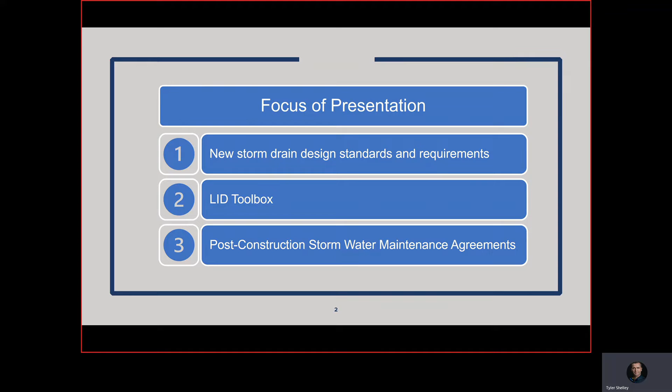So other than that, I'm going to start with an introduction of what we're doing here today. This is the focus of the presentation: we're going to go over the new storm drain design standards and requirements that we implemented about a year ago. Tyler's going to go over our LID toolbox. This is just a tool to help with the new LID standards and the post-construction stormwater maintenance agreements.

The reason that we did the updates was because the state told us to, basically, in a nutshell. We also wanted to update and streamline our standards and make sure that they were easily accessible and easily understood. We're still working on that. I know our website is awesome, but bear with us, we're trying to work on that the best we can.

Because we are under the Jordan Valley permit, we are a small MS4. We have to follow the state standards. The state required us to implement LID measures, low impact development, as well as revisions to our stormwater standards. The state standards were that if it's a new development above an acre, we must retain the 80th percentile storm, or a redevelopment that's above an acre, or you're increasing the impervious area by more than 10%, then you'll have to retain the 80th percentile.

I've run into a lot of individuals who think that regardless, you have to do the 80th percentile. It's actually not the case. This doesn't affect a lot of properties in Sandy because we are an infill city. There's a lot of development that doesn't have to do the LID measures, but if you do, we have stuff for you to help you out with that.

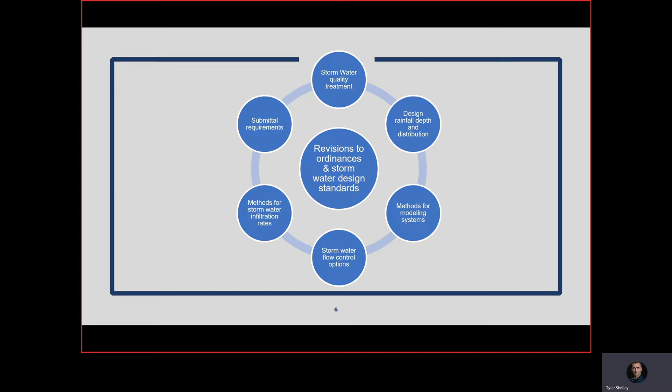As well as submittal requirements with COVID and working remotely from home, we wanted to get on the digital review bandwagon, which has been desperately needed for many years. So we're really happy we're finally moving in that direction. That's been a huge effort, but we are moving forward with it.

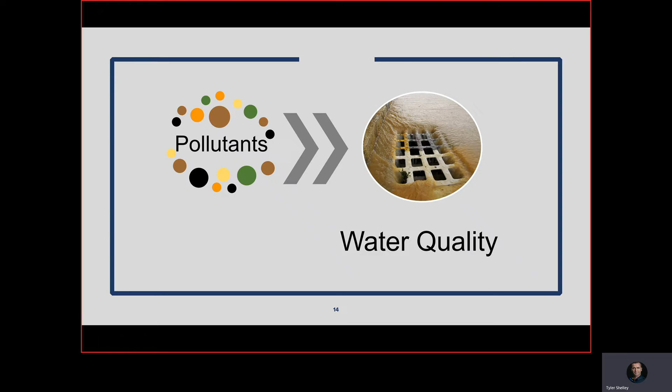So in our requirements, we're going to focus on - and I apologize, you're going to have to listen to me a lot because I've been heavily involved in development of these. So I figured I probably should just present all of this portion, and then others will follow on other things. But I'm going to focus on water quality requirements, the hydrology, and the hydraulics. Right now, I'm going to focus on water quality. So back to our table 1.

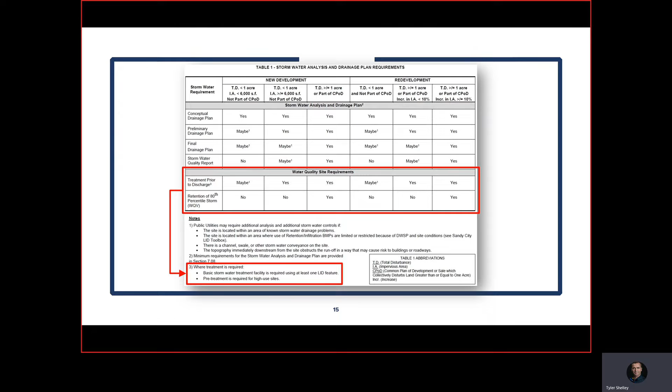So if you have to treat the stormwater discharge, we have two levels of treatment that we require. The first one is the basic treatment facility, and the other is pre-treatment facility. I'm going to talk about the basic treatment facility, and what this is - this is where you use the LID features that we will allow in Sandy City.

The state requires that each MS4 allow 7 LID BMPs, and if we don't, then you can use whatever you want. We've elected to choose the ones we want: bioretention, permeable pavement, wetland, dry or wet pond, vegetated swale, underground detention, infiltration, vegetated strip, and vegetated basin - which, in my mind, is kind of that typical detention pond that has always been done in the past. We consider that an LID BMP. It is, if it's designed appropriately.

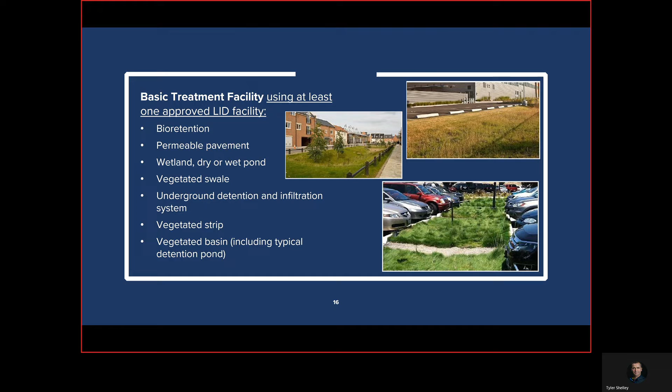Should probably silence my phone.

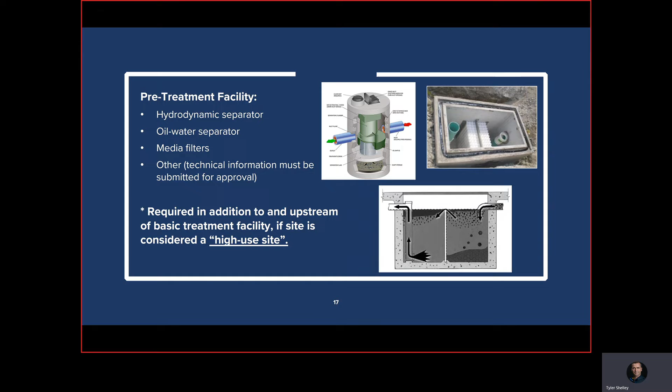Okay, the second is the pretreatment facility. A pretreatment facility is required only if the site is what we call a high use site - I'm going to talk about what that is here shortly. But the pretreatment is always required upstream of a basic treatment facility. Those include hydrodynamic separator, oil water separator, media filters, and other, if you feel like you want to propose something and we're okay with it.

All right, so I talked about the high use site. So no longer, typically in the past, we've said oh, you have a parking lot, well, you're sticking in an oil water separator no matter what - that's no longer the case. What was the reasoning requiring it to be upstream of basic treatment? Yeah, that's - it increased the cost quite a bit. I did prove that, okay.

The thought is that we, with knowing that there will be infiltration, that we would prefer to have it go through the pretreatment prior to where it would be infiltrating. And on a case-by-case basis, we would probably consider looking at other things that you're proposing that make sense.

The high use sites - again, these pre-treatment facilities are not required for every site, but the high use sites, a long list here, so you'll need to go through and see if your project falls into this. It's definitely not every site, but this does include some parking lots where traffic count exceeds 100 vehicles per 1,000 square feet of the gross building area. This typically includes supermarkets, convenience stores, gas stations, auto operations or fleet maintenance facilities, salt sand piles, and sumps. So if there's ever going to be a sump, the pretreatment facility would have to go upstream of it.

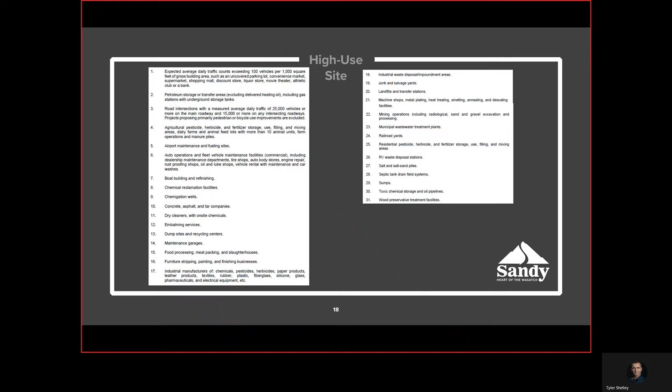All right, our water quality capture volume - so our precipitation depth that we've defined for Sandy City is a half inch.

We require that you calculate that volume using the SCS curve number method. You retain and infiltrate that volume where feasible. And this is a big thing we really spend a lot of time trying to figure out—how to incorporate this water quality capture volume into the flow control elements of your site.

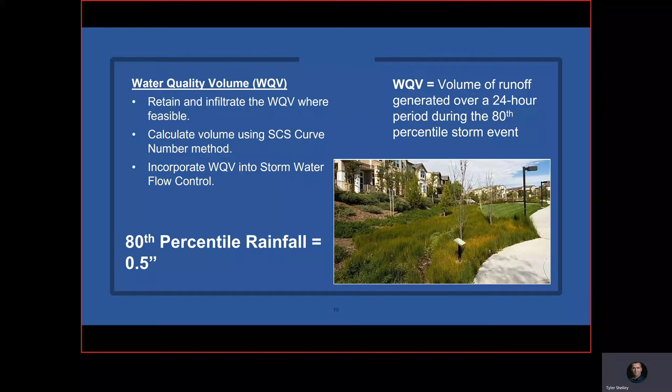Yeah, correct. Yeah, we do. And that's all in our LID toolbox, and I'll talk about that here shortly.

All right, so I'm going to jump ahead just a little bit to some hydraulics to tie that water quality volume in with our flow control.

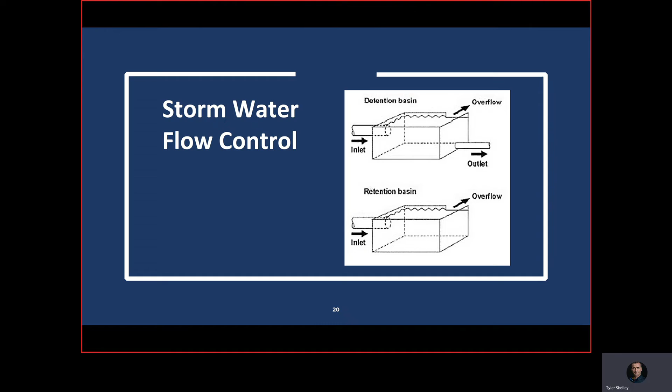So here's another critical table for you. Table 1 was knowing what your site's requirements will be. Table 10 is the next one—this is where we lay out our stormwater flow control options. This is kind of your menu of options for flow control.

We have options A, B1, B2, B3. The idea is that you'd start at the top and work your way down. However, that is not required—you can pick any one of these.

A couple of things I wanted to point out here: each option, other than B3, requires an analysis demonstrating that the 100-year, 3-hour overflow will be safely routed to the street and not flood structures. Even when it makes it to the street, you need to make sure you're not going to end up at the bottom of a cul-de-sac and flood a basement. So you have to look at that flow to see what happens.

Also, these options include full retention, some are detention, and there are combined detention options here. For detention, anywhere there is detention in the flow control, we require that the release rate is still 0.2 CFS per acre—typically could go down to 0.1 in some situations, depending on the downstream system capacity.

One last thing I want to point out before looking at each option individually: wherever there is retention, you're looking at the storm duration of a 24-hour storm. When you're looking at detention, it's the 3-hour.

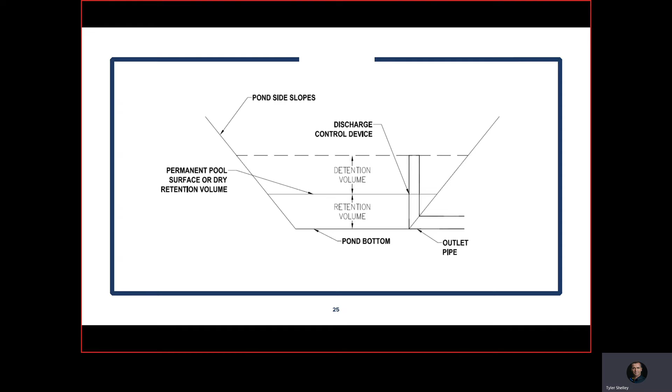Option B2 is very similar to B1. The big difference is there's potential for needing to detain the 100-year event. The reason for that would be a situation where you have a detention pond and a downstream system you can discharge your stormwater to. However, when you do your 100-year, 3-hour overflow routing, you find there's no way the 100-year can go anywhere—you're going to have to detain the 100-year. If you can detain it, you could also retain it, which pushes you to option B3, but I don't think anybody would want to do that since you have a connection to discharge to. You're just going to have to detain the 100-year.

In that situation, you now have to also look at your conveyances. You have to be able to actually convey your 100-year event into your pond. So there are some different things that you have to look at.

Option B3 is where you're having to retain the 100-year, 24-hour event. This is in a situation where there's no system downstream for you to connect to. The 100-year event, you're going to flood someone. Unfortunately, this is that option. I'm hoping not many have to use this option, but it is there in case it's needed.

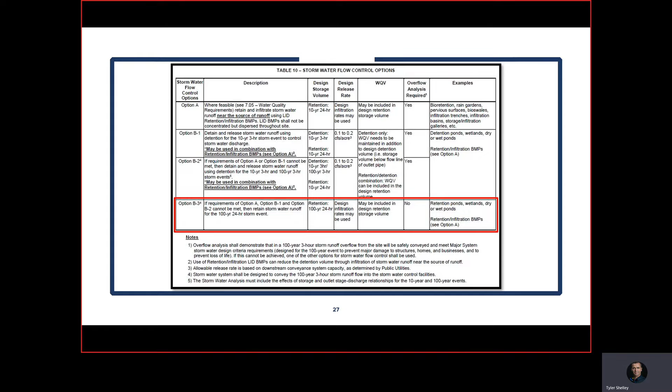Okay, if there are any other questions on that?

All right, so allowable infiltration. This map, although it's not current, kind of gives you an idea of where infiltration is not allowed. This is in our LID toolbox, but we will not allow any infiltration in our drinking water source protection zones 1 and 2, if they're clay soils, high groundwater within 2 feet of the bottom of your infiltration feature, contaminated soils, and if the slopes are greater than 10%.

We've shown some areas where we've anticipated it's not going to be feasible to go there. I think the only thing we're showing, and this actually isn't accurate, but within zones 1 and 2, absolutely no infiltration. Other than that, it's kind of on you to do your field work and determine if it's feasible or not. I'm going to get into some of these details.

So, Mason, we also have a GIS map layer that we can show you, kind of those no-go zones. You can kind of see it up here, it's kind of where the striping is. We can send that to you for your area for easy access, so that would eliminate that quickly. Again, I think the main thing is just those drinking water source protection zones 1 and 2 — you can't infiltrate there. Other than that, this is kind of giving you just a guess.

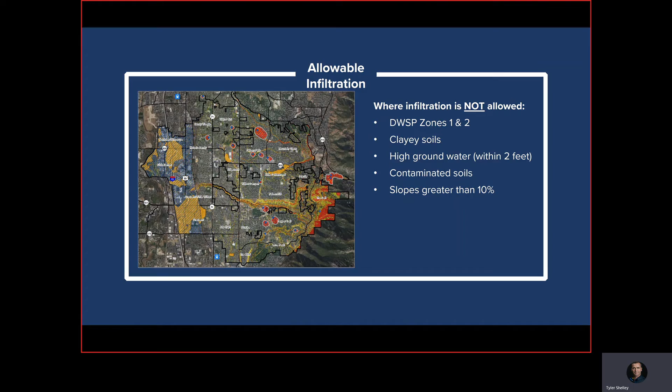Okay, so if you cannot infiltrate stormwater, what do you do? That's what I'm going to talk about now. We've kind of defined this, and I think the state guide does this somewhat too, but we've separated our retention and infiltration BMPs from our flow-through BMPs. If you cannot use any of the retention infiltration BMPs, it's going to push you to the flow-through BMPs.

And the reason we're doing this is, as you all know, the state has basically mandated this — it's shown there in the requirement. It says if retention of the water quality volume is infeasible, then a rationale shall be provided. So what we've done at Sandy City is tried, through all of this work, to give you a good rationale to say, hey, I can't do infiltration here, I'm going to use this method.

And you're going to document that in your stormwater report. Remember, I told you there's that drainage plan with the 2 elements — you're going to document it in your report, and part of that report is the water quality report that the state requires.

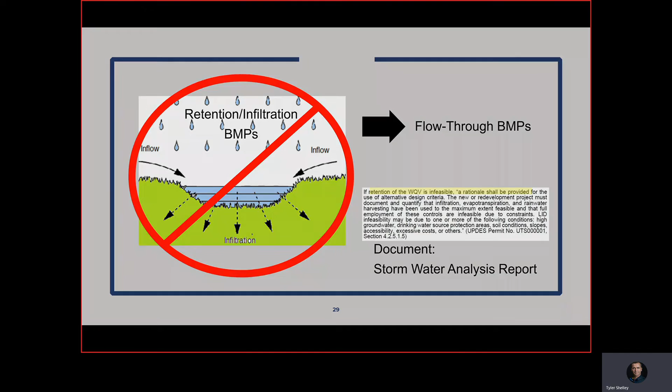However, you have to demonstrate that you are going to infiltrate within 72 hours, that it all infiltrates into the ground. Okay, for your flow-through — if this is what you're going to use, and we're going to walk through how you determine which one you're using — your design now is looking at just your flow rather than your volume. This is your 2-year, 3-hour storm event.

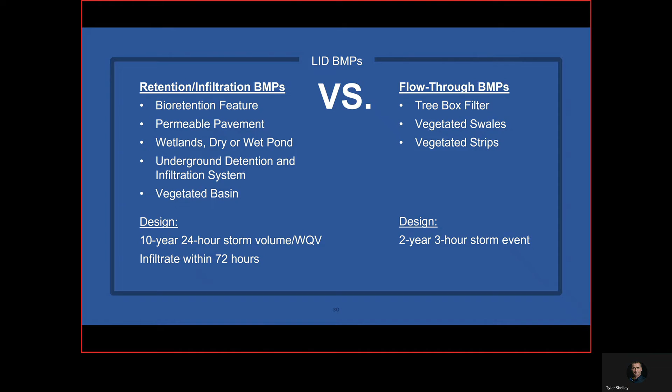And I'm sure most of you will have no problem, but it should be very helpful.

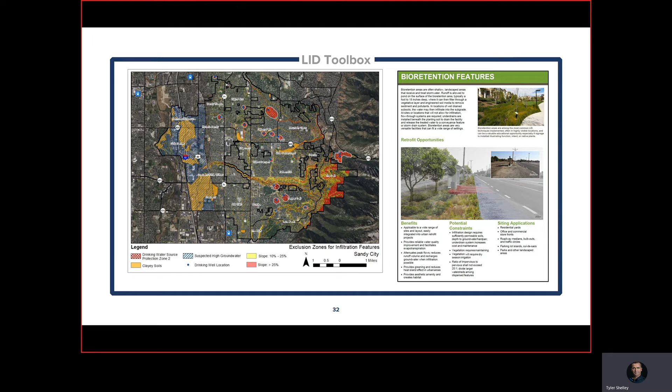In the LID toolbox, we have that same map, although it's outdated. We have fact sheets for each of the 7 BMPs, and that even has guidance for the benefits, constraints, siting applications. In fact, we actually require you to include these fact sheets in your stormwater analysis report, and you can address the different things in your report with that.

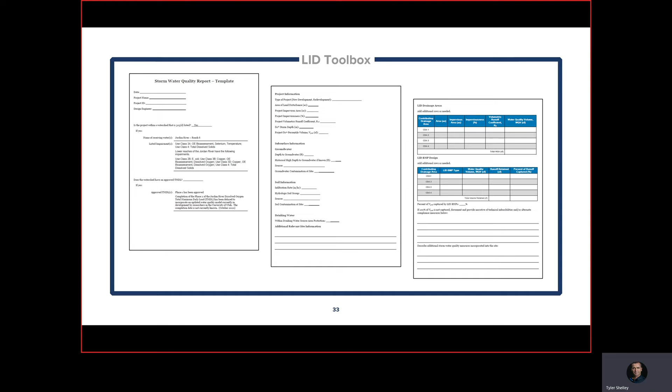All right, I'm going to go through an example here, and then we'll break for lunch. So this was a report that was just recently submitted, and I really liked their layout here. Although we haven't gone into detail reviewing all the details of it, I think it's very good, showing very well how this is to be used and how we want it to be used.

I think if you use it this way, it will make it a lot easier for us as we review it. And if it's not easy for us to review, a lot of times we kick it back and just say, hey, please resubmit, as you guys all know.

So for the first one, they kind of split this up into 2 subbasins, the north half and the south half. This is an industrial site just up the hill here that's being proposed.

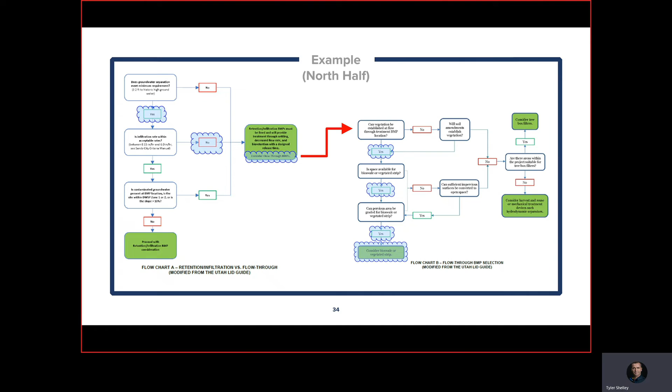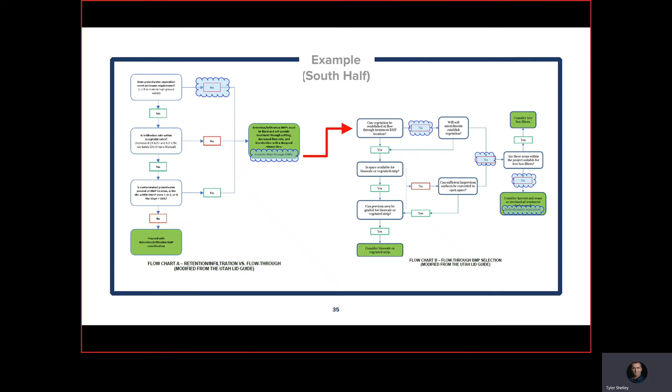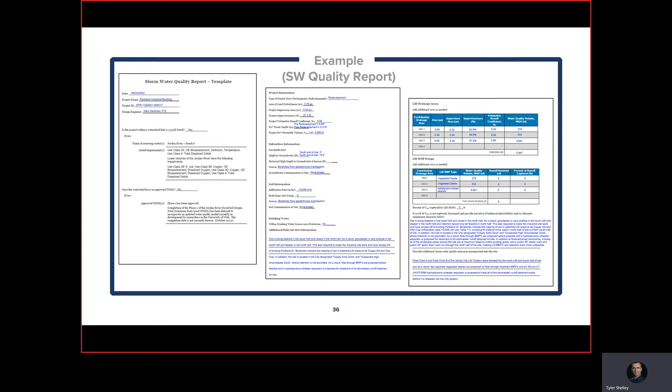We're going to have to see these reports every time now. So we haven't really been particular about receiving these, but this was kind of our kickoff saying, hey, from this point forward, I would highly recommend just walk through our document and submit everything we're asking for. In fact, Lenny's going to talk about some checklists that we've developed that can help you.

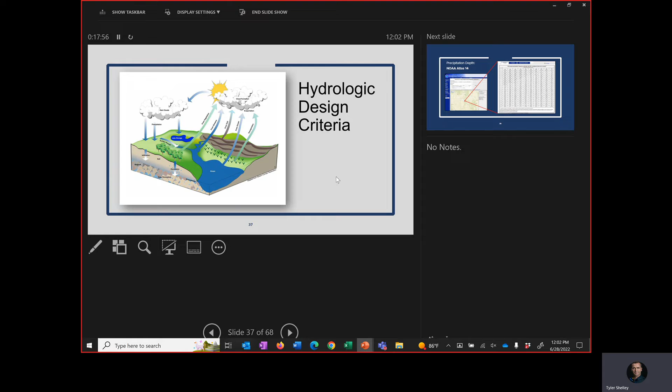All right, so we talked about the water quality part of our requirements. I'm getting now into the hydrology requirements. So let's see where we're at.

Our precipitation depths that we require to be used now are to be pulled off of the NOAA Atlas 14 website. That'll give you the 10-year, 100-year, and the 2-year for the water quality flow requirements.

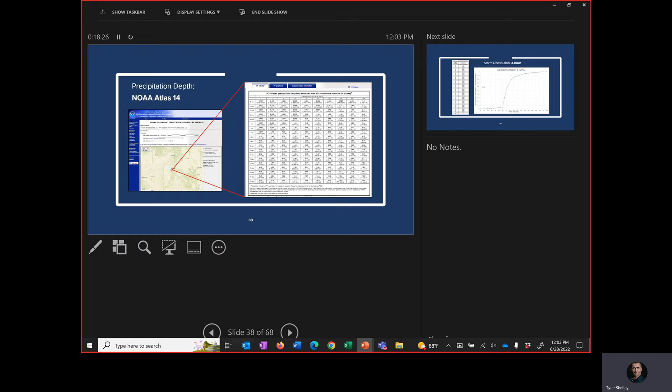The distribution that we require to be used is the 3-hour storm duration. I believe this was developed by Salt Lake County originally, and we've adopted it.

Our storm drainage criteria: we have our minor storm, which is the 10-year event, which is to be contained within the right-of-way. That'd be in your storm drains, your curb and gutter, and even back to the back of sidewalk in most cases. The major storm is your 100-year event.

That is for containing the water, basically not flooding structures, to keep it simple. So when we require that, follow that 100-year 3-hour storm down through your site and where it's leaving. We want to know that it's not going to end up at the bottom of a downhill cul-de-sac.

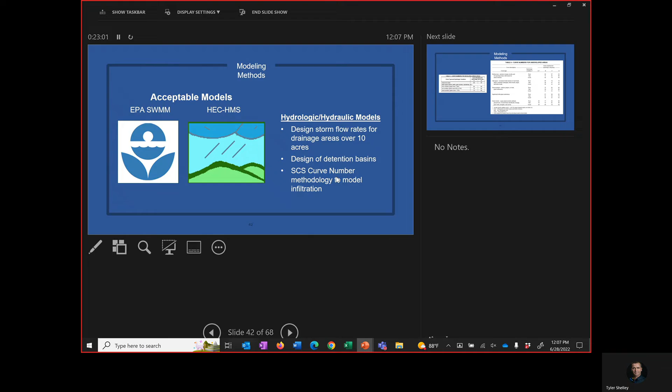And along with that, you have to use the SCS curve number method for infiltration. We've also provided allowable curve numbers for developed urban areas, and you'll notice that we've only provided those for the soil groups C and D - it has to be one of those two. And then also for undeveloped areas, we've provided curve numbers for that as well.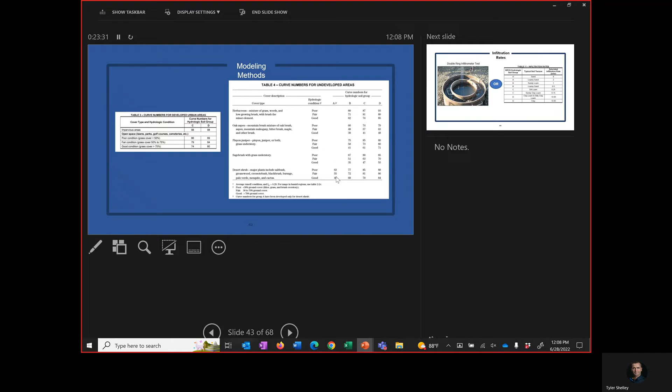All right, this is a big one. So your infiltration rates. Wherever you are going to be infiltrating stormwater into the ground, we're now requiring this double ring infiltrometer test to come up with your infiltration rates. There are certain requirements where you have to do a certain number per square foot of area of that infiltration system, and you would go with the minimum or the lowest of all of the tests.

In some cases, you may prefer not to do the test. We've provided you a table, which is very conservative, that you could go ahead and pick off an infiltration rate based on the geotech study that was done.

Yep, and again, this is all laid out in our standards now. We did do the safety factor we applied to that. It applies for both, whether you're doing the test or pulling the value off the table, it's a 2.5 safety factor. Just to confirm, the table does not already have a safety factor. Correct, it does not. You pick the value off the table, and this is explained in our requirements, and divide it by 2.5 to come up with the infiltration rate that you're going to use. In most situations, this is the infiltration rate you're going to demonstrate that the stormwater will have infiltrated within 72 hours.

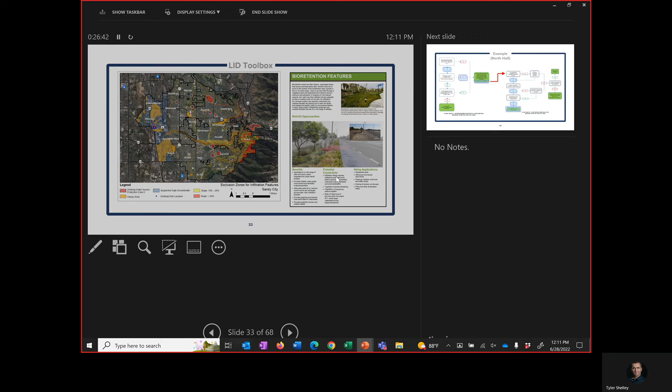So in those situations where we're dealing with heavy clay soil, if you cannot infiltrate, that takes us right back to where we were before, going through those flow charts. If you find that your infiltration rates are not acceptable, it pushes you to these other LID options, your flow through, rather than your retention and infiltration. Hopefully this makes sense.

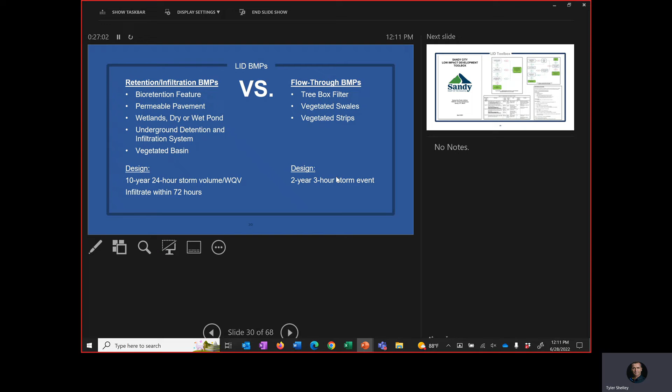So you're either using your infiltration BMPs. If you're finding that's not going to work, then you're using the flow through for your treatment. In some cases, the flow through BMPs may have to be lined if the groundwater is too high. Does that help? Okay.

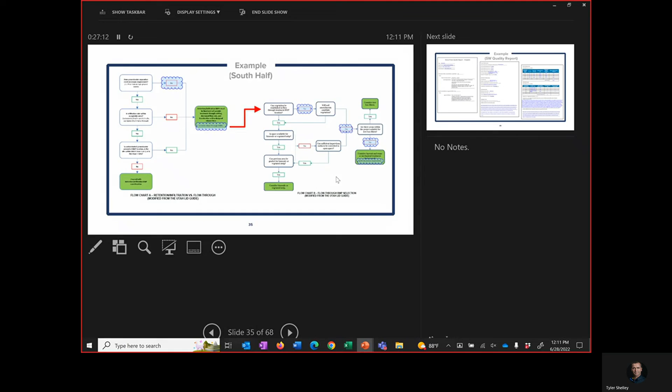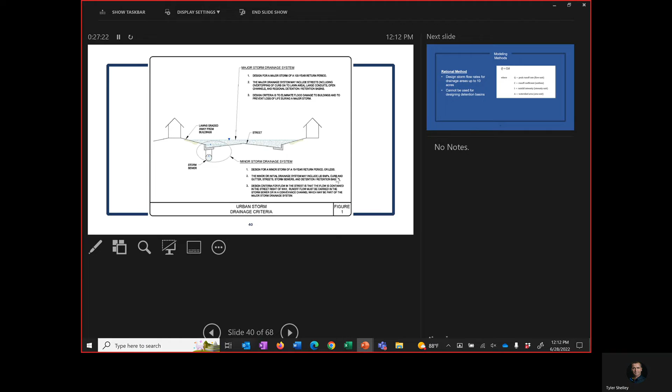We haven't. Yeah. No, we haven't. Okay, any other questions here?

All right, I'm not going to get into the details of all this, but we do have design criteria, hydraulic design criteria for your street design and drainage, your gutter flows, your spread, encroachment, and your inundation standards. So look at those, your storm drain inlets, your storm drains. There are some new requirements there that I'm not going to spend a lot of time on, because I think you guys, they're pretty standard.

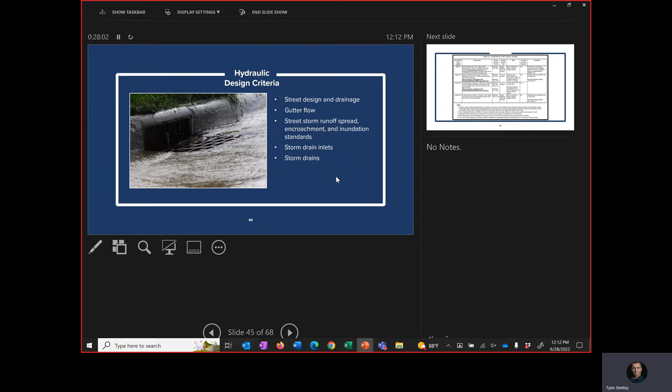We talked about this. I wanted to address this in the water quality section so you could see how they tie together with the water quality. But we've talked about the options here.

All right, your flow control elements need to be designed to accommodate some very specific items that we've now laid out. Your roads, so we're talking that flow control feature, right? Those different options we've laid out, your detention, retention. It has to be designed to accommodate the roads, curb and gutter, driveways, park strips, sidewalks, fronts of yards that slope toward the street, portions of homes that drain towards the street, and other areas that are tributary to the street. So depending on your site, if things like backyards are sloping towards the street, it has to be designed for that.

And obviously you're going to have to make assumptions on some of the houses and just include that in your report, as far as the portions of the house that are draining to the street.

For the parts of the development that are not draining to the street and to those more regional facilities, this is where each individual lot is required to manage their own stormwater. This typically is when you're getting into like a single family home that's being built. It does have to be demonstrated, this gets challenging at times, but it has to be demonstrated that they are going to manage their stormwater. So this would require some sort of a pond or swales, berms around the property.

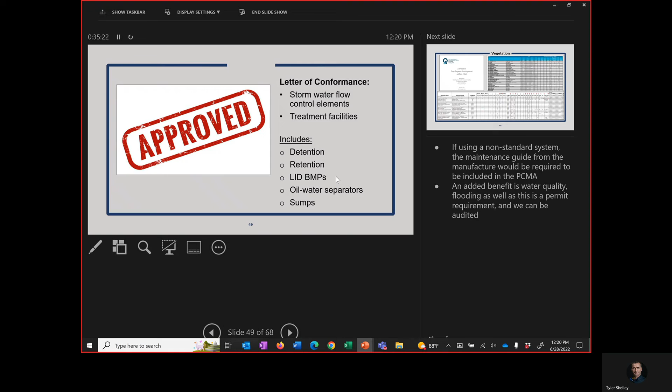Yeah, if that makes sense. I wish we would have done this differently. We'll probably make a change here in future versions, but the requirement is 10-year, 24-hour, unless you cannot handle it, also the downstream, exactly.

Anything else? Give Tyler a little hand of applause. Maybe a short hand. I can do that because I'm tall.

Okay, so I'm going to introduce to you Dawn Barbie. She has been at the city now for 15 years. She received her bachelor's degree in social behavioral science, so she's going to be analyzing all of you as she speaks. She's available afterwards to give you a bio on yourself. She has been with Public Utilities for the last 5 years, and I believe has been doing the stormwater quality coordinator position for 2 years now. She is very passionate about stormwater, so don't spill anything in the city, she will show up like that. Without further ado, Dawn Barbie is going to discuss the post-construction stormwater maintenance agreement.

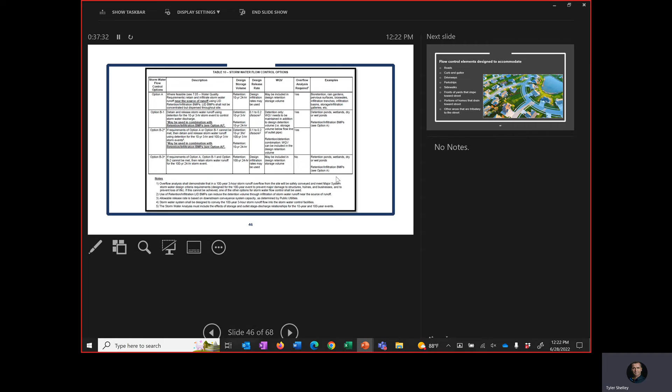So I did want to point out one thing, this is the state's toolbox. They do have, in regards to vegetation, some examples as well as what they're good for. If you ever need a plan or have questions about what might be good for certain bioswales or whatever, it's a great resource. I'm actually adding to it, and I'm going to put this on our website if you're interested. So not only is it great for stormwater, but also water usage, tolerance for salt, maintenance, those kinds of things. So if you want that information, I'll put it on the website. It's kind of like my little baby passion on the side with everything else.

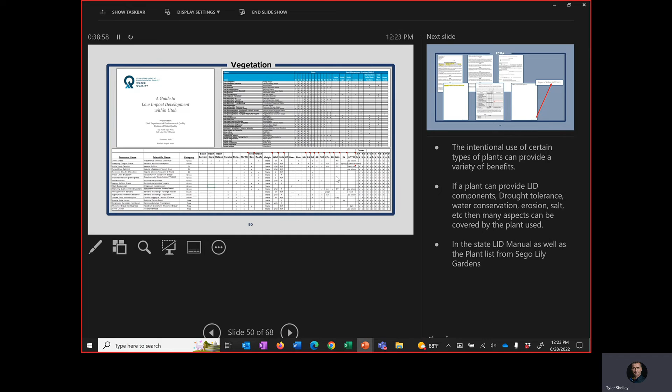So my presentation, the rest of this is going to be about post-construction maintenance agreements. We've had some recently where people in their design were either not getting the post-constructions, or there's a lot of confusion about what we're looking for. So this presentation is just to kind of clarify what our expectations are.

So our intention with this plan is that two years from now, when the inspection needs to happen on the site and needs to be documented and that information sent to us, that it's very clear and concise - you know, what is on this property. I'll get into that a little bit more. I'm a little ahead of myself here.

And when we're talking about clear and concise, USWAC, the Utah Stormwater Advisory Committee, we came up with this template, and it's very complicated. We get some of these post-constructions and they're like 30 pages because they have all the stormwater calculations and all that craziness. But here at the city, we do that all in the design phase and in the approval phases. So, you know, let's make it simple. Okay, this is what we're looking for.

So the agreement itself is pretty standard - the site information as well as the owner information, have it notarized. Once it's notarized, then it's finalized.

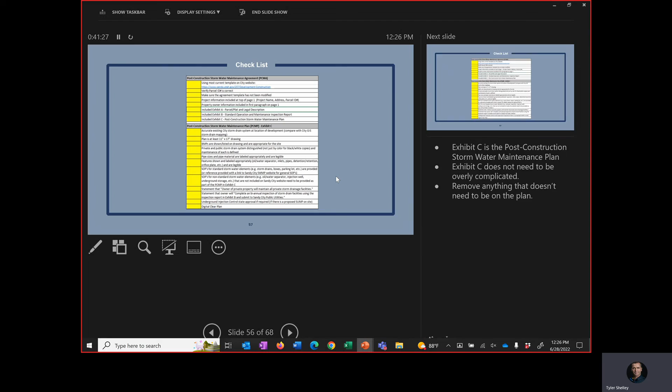Okay, now Exhibit C, this is where we again have a lot of questions and problems and issues. We are looking for a very clean document - what materials are used, where are things located, who's responsible, is it private, public, you know.

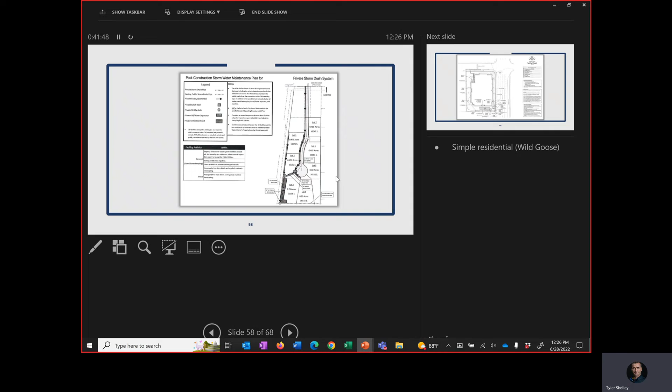And I have a checklist, I'll show you that, and that might be a little easier. These are all the things that we're looking for. This is on the website, I can email it to you if you have any questions. But again, the whole point is two years from now, you've got a maintenance company come in, or you've got an employee that needs to do the maintenance. What do they need to do? What are they looking at? What do they need to maintain, and how do they maintain it? So if you've got some specialized hydro blah blah blah thing, include that information in the post-construction information so that maintenance company knows what they're dealing with.

Does it make sense? Because I mean, it's been very kind of convoluted on what this plan is, or how we view it should be.

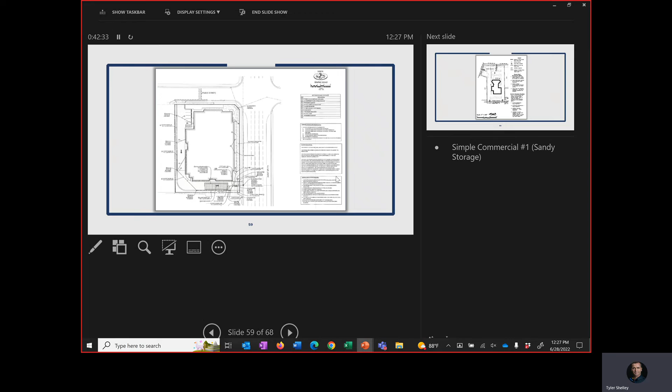This is another one, it's a storage company. Just want to show that, you know, take off any layers or anything that are not necessary, because we get some and they've got the drainage and the erosion and all this stuff, and it really muddies what we're looking for going forward. And this is even one that, you know, I took a highlighter to and said, okay, this is what we want, keep it simple.

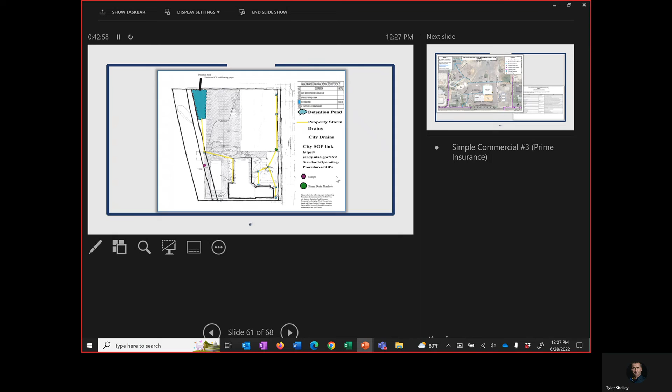And then I did want to show you, this is the actual post-construction plan for this property. So it's pretty advanced, and sometimes we get people with very simple projects trying to get crazy like this. This is meant for just big, complicated projects.

Oh, and he's not even here to defend himself. Nice, you're right.

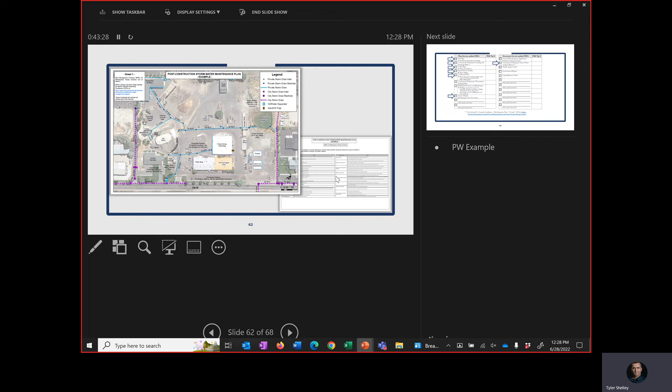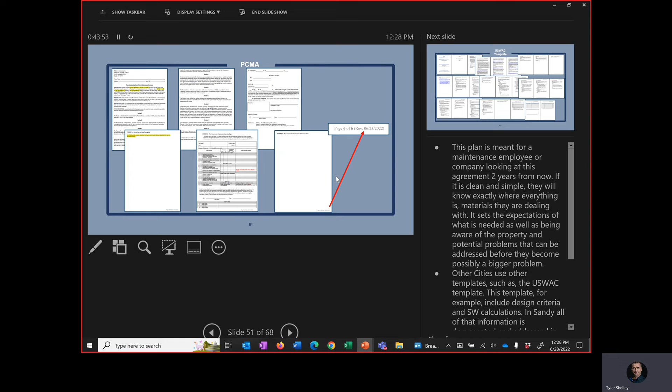So we just wanted to highlight that anytime we do a revision, I always have a revision date listed on these, and I'll go back to that really quickly. I'm really good about if I make any changes to that agreement, I update it and put it on the web. So if you can avoid downloading it and reusing it for projects, because more likely I get kicked back sometimes, I'm like, okay, this is from like 5 years ago. Our whole thing is just to get you moving through your projects. We want to help you. We want to streamline, we want to make it easy, and anything we can do to accomplish that, we are game. Any questions?

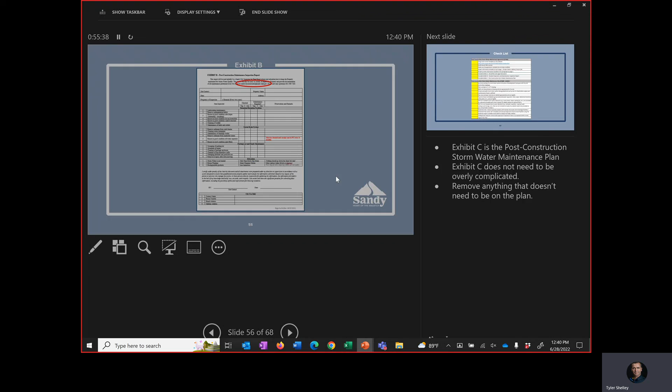A good geotechnical engineer will ask for design work to work together. At the point you're asking, he doesn't have enough information. He doesn't know how big the building is.

At the conceptual or preliminary stage, you can use soil data that we provide. It gives you a general idea, a basis for doing your stormwater design. Then when they start doing their design loads, that's when you get the geotech report.

Really, we're not looking for a lot of details. We're just wanting that baseline with the conceptual plan, and we build upon that.

As you fine tune your site, then as engineers - whether you build a building, if money is not an object, you could just put a brick, right? And it's going to cost you a lot of money because it requires a lot of material. But as an engineer, what do we do? We minimize it so the cost comes down. Same thing with the pond - it could be big, but as an engineer we minimize it.

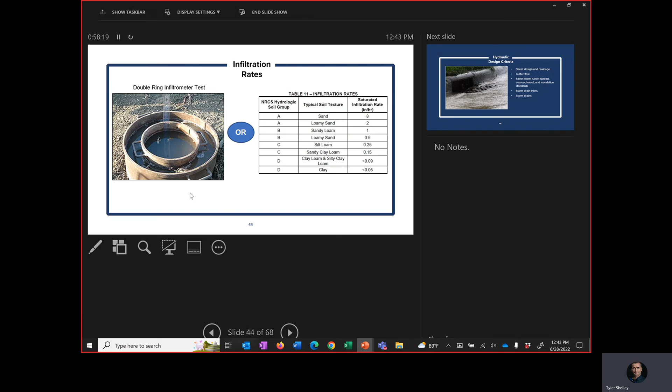Good comment. One challenge we're dealing with is right now, the way a Sandy City submittal process works, you have preliminaries and final. In my mind I've tried pushing this but it hasn't happened yet - I think there needs to be even before that, there really needs to be a conceptual stage.

Because stormwater is kind of driving the site plan now, and we really need - I mean, we've called it conceptual/preliminary because we don't have a conceptual stage right now, so we've combined the two. But our big recommendation is that you come talk to us. There's a checklist that Lenny's going to talk about, but there is a concept plan we recommend you do.

It could be fairly simple, but show us what you're thinking. You may not even have to go through the infiltration rates at that point, but just show us what you're thinking - we think our retention pond is going to go here, we're going to do some retention here, our water quality volume will be included in that retention area, and then we're going to have detention over here outletting to the system here.

That would at least give us an opportunity to say, oh, there's not even a manhole right there that you're saying you're going to connect to. Does that make sense? So we're not quite sure how to merge those together, but that's kind of the challenge we're facing.

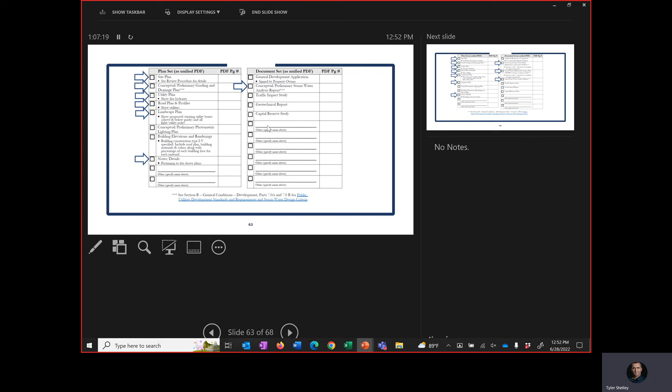All right, so that's the final. So here's the conceptual storm drain analysis checklist, pretty straightforward, similar to any of the plan sets you guys have developed. We're going to put this on the website, Cam, and we have your email now, so we'll send you a link.

So basically, this is the conceptuals. Notice the conceptuals is like a one page checklist. The preliminary is a little more, again we build more on it, so there's more stuff to do, more stuff to add to it.

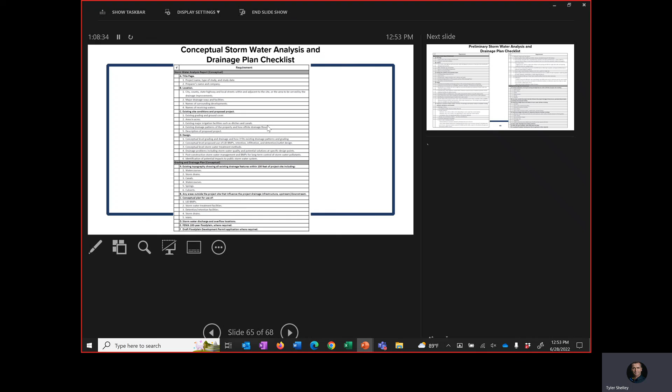Correct, so some of this is already done. It's not like you're having to come back and redo it unless there are changes, because you're just building upon the previous reports. That's the preliminary storm drain. I don't want to go into the details because we're gonna be sending you a link, you'll have that in the next day or two.

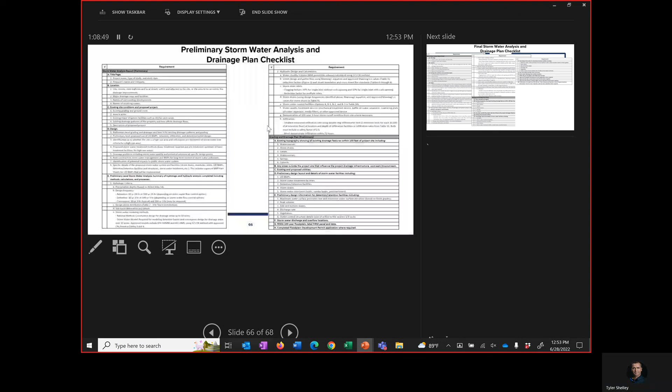And here's the final. Again, more stuff to do. It builds upon the conceptuals, preliminary, and final. And again, we're here, usually it's just me and Tyler too.

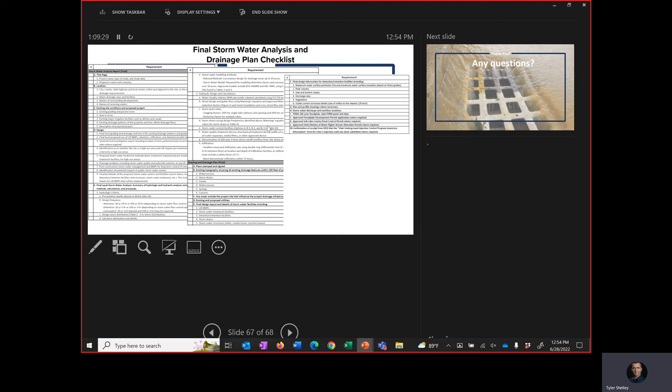We're trying to get Tyler to be reviewing the storm drain. We're here as a resource. If you have a client that has a project in Sandy, come talk to us, ask us where the storm drain line is. Some of you have. So we just need to do that more upfront. Okay, that's it, any questions?

Is that for sites larger than 10 acres though, or is that all ponds? Because we've typically just used our little Excel thing and been like, you know, we know it's a little oversized, but every little pond-

Using the SCS curve number method. Residential homes, single home? No, those would be more on the retention side. So you're looking at just the volume. The single lot, we're still allowing the rational method. Single lot, well, but it needs to be used, the SCS curve number method for, then you're just looking at your volume. Yeah, the volume method you provided to calculate that, using the SCS method is perfect for that. Yeah, it's because it's all retained. Exactly.

So I'm gonna be ignorant and ask this question: does the city have a stormwater impact fee that they charge? Yes, we do. We have what's called an ERU, equivalent residential unit, that is charged - each home in the city is charged one ERU for stormwater, one for streetlights. That's a monthly fee that a homeowner pays, or a business. A business will, depending on the hard surface area that they have, pay multiple ERUs based upon the square footage of their hard surface.